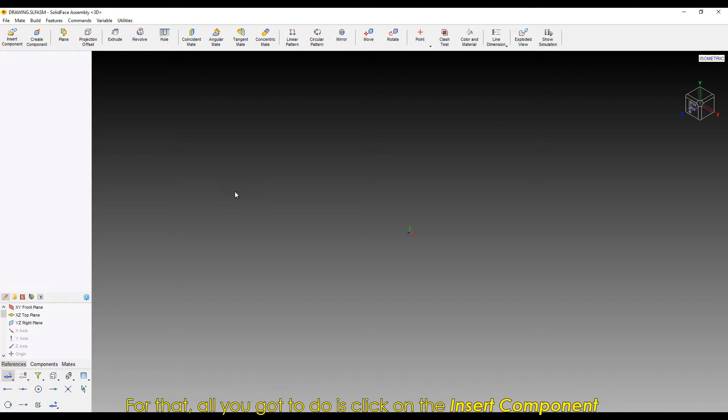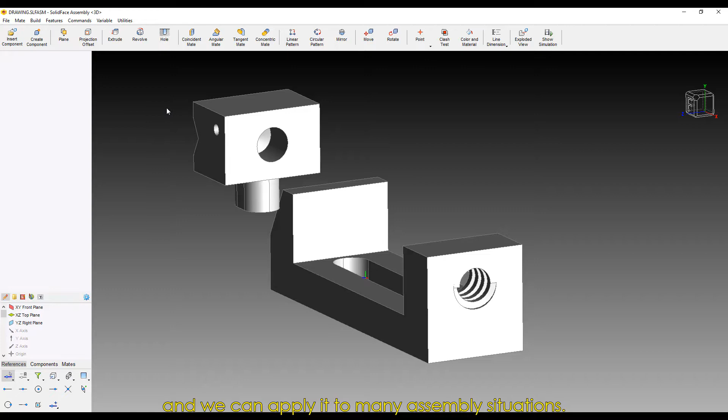With those parts in our environment, we'll start using the mate tools. We'll be using concentric and coincident mates a lot, as they're the most generic tools and can apply to many assembly situations. We're starting with the concentric mate because our main reference for those parts will be their holes alignment to attach the spindle. After that, we'll use the coincident mate, and it'll keep the mobile jaw where it should stay.

Select the Insert Component tab again to add the guide sheet. It'll be added to the bottom part of our assembly. After that, we need to restrict it by using the coincident mate.

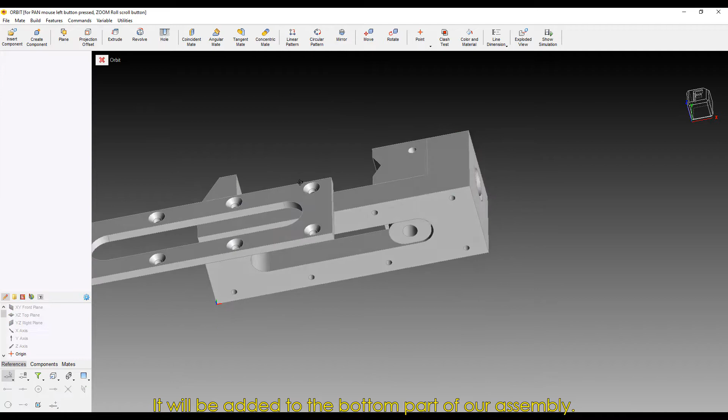Now we'll add the bottom stop, that small part that goes on the bottom of the assembly. With a concentric mate, we'll align the holes, and with a coincident mate, we'll make the parts face each other. Please note that there's a difference in their height, so keep that in mind when using the mates.

Back to the upper area of our assembly, we'll add the spindle. We're going to use both concentric and coincident mates on it as well. The concentric mate will align it to the hole, while the coincident will face the spindle at the end of the part. We just need to pay attention to the lateral hole's alignment because we'll add a pin on it to keep the parts together.

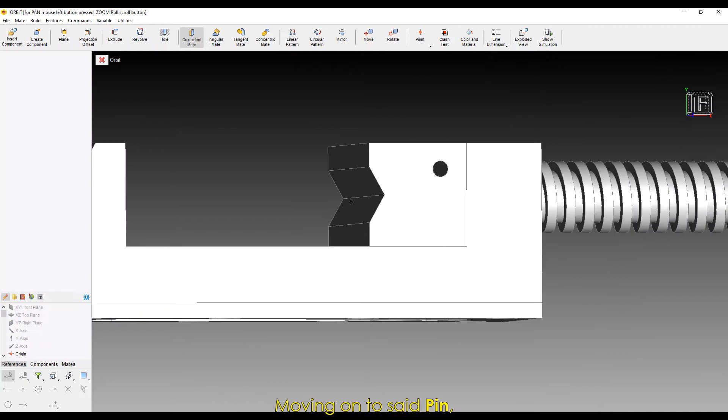Moving on to said pin, we'll add it to the assembly by the Insert Component tab, and we'll select the part we're attaching it into, indicating a reference point. Now, enabling the concentric mate, we'll select the pin and the hole to which it will be attached. Using the coincident mate, we'll select the pin's face and our part's lateral face. Enable the Distance tab and add the measure of 1 millimeter.

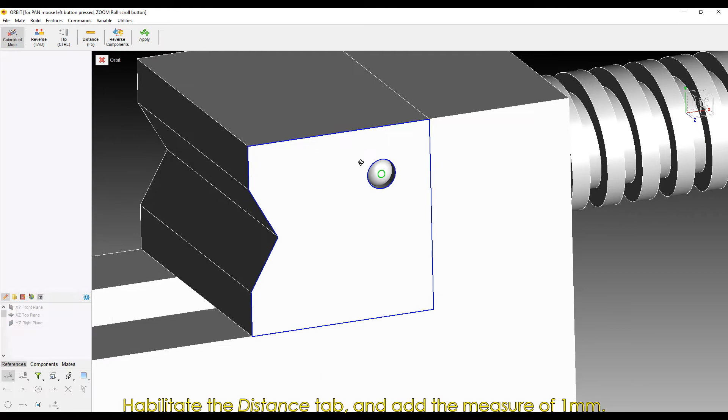The last part to add is the handle, and we'll move on to the library's items. We'll add the handle, and using concentric mate, we'll select the part and the hole to which it will be attached. That's it.

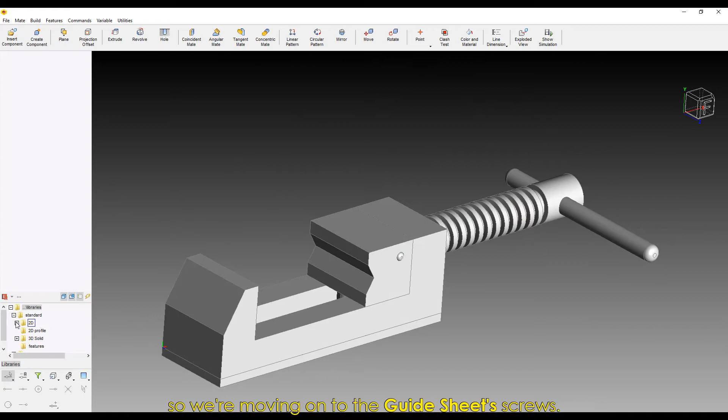All our modeled parts are added to our assembly, so we're moving on to the guide sheet screws. We're going to select the private library, and we'll select the ISO 10642 screw. When you do that, a window will open, asking some screw specifications. We'll select

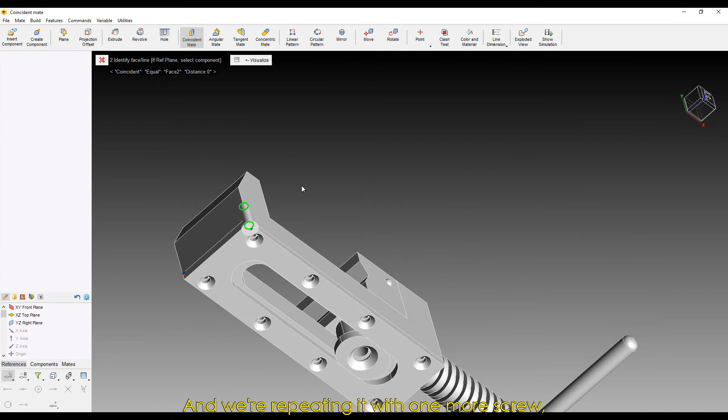M4X16. We'll then select any point on the area, as we're attaching it to the hole later with the mates, and we're repeating it with one more screw, to which we'll apply linear pattern later. With both screws added, we'll select the linear pattern tool, and for instances, we'll select the screws. In direction 1, we'll select the direction the screws will be added. In quantity, we'll input the value 4, and in distance, we'll add 37 millimeters. After that, we're confirming the operation.

Now, the only missing part is the bottom screw. It will be the ISO 10642 screw with the M6X16 specification.

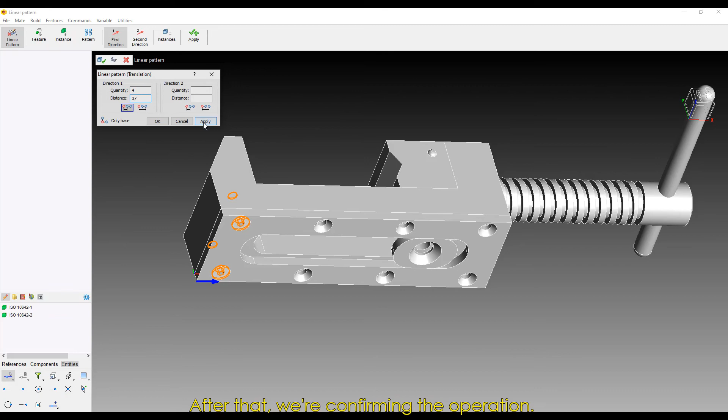See? That's as easy as pie, wasn't it? Now our bench vise is ready.